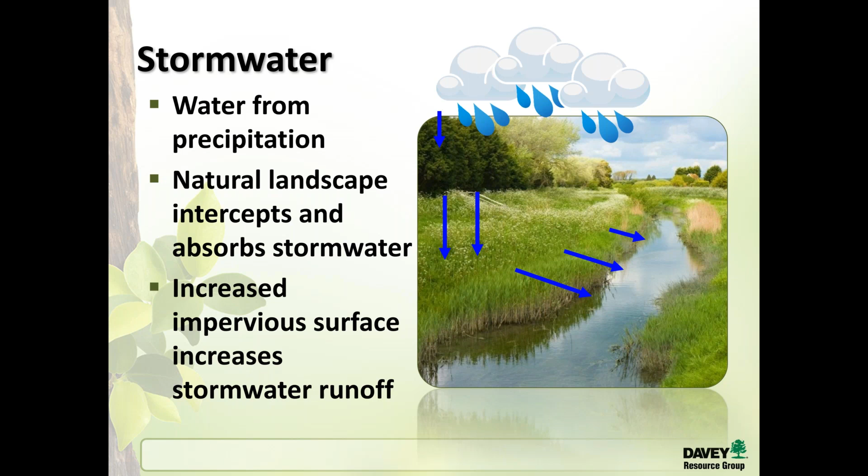So we were talking about what stormwater is and how stormwater runoff is increased by the increase of impervious surfaces. So as we develop the natural landscape, we're increasing impervious surface and increasing stormwater runoff. So we realized that we needed to regulate this runoff and figure out how to treat it so that fewer pollutants are making their way into the waterways.

So how is it regulated? We have regulations under the Clean Water Act. In 1987, there were amendments to the Clean Water Act that actually introduced stormwater. And those regulations mostly revolve around the National Pollutant Discharge Elimination System. The acronym for that is NPDES. When that first launched, they were looking at point source contamination, so mainly just industrial sites that were directly dumping into waterways.

Later on, there were further amendments that determined we needed to look at non-point source places of pollution. So that included stormwater runoff and where that water was picking up excessive pollution that was entering the waterways. That's mostly regulated by the Environmental Protection Agency. In some states like Ohio, it's regulated by the Ohio or the state EPA.

And then after construction is complete and 70% vegetation is reached, the developer or the property owner is released from that permit, and they tend to have post-construction best management practices. Those are regulated often by counties and cities under land management agreements where the property owner has assumed responsibility for managing and maintaining the stormwater facility or BMP.

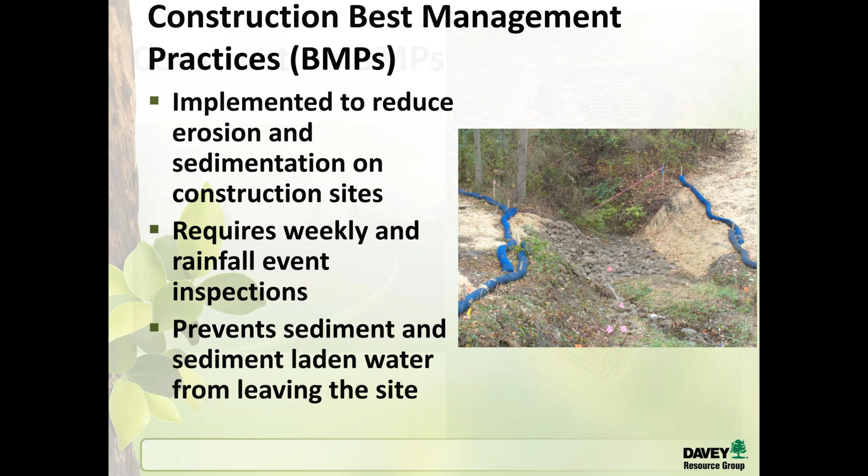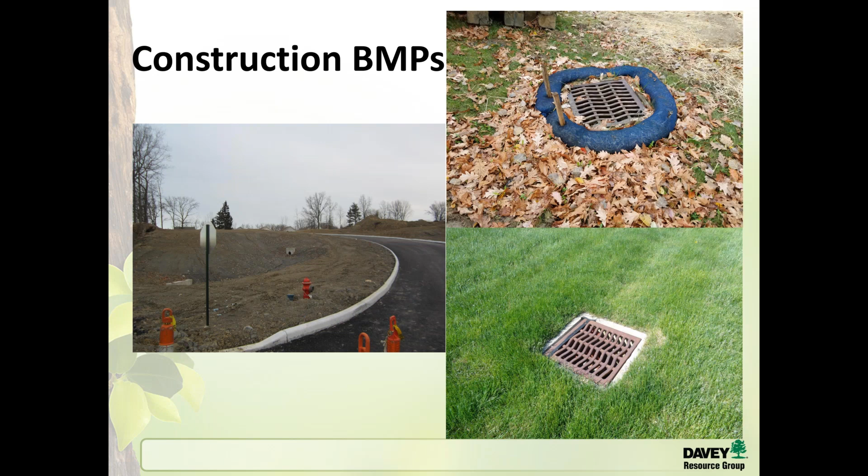And on the left side of the slide, we have a sediment basin. So this area is being developed into a subdivision, and the runoff runs into the sediment basin. And the purpose is kind of the same as the ponding for the inlet protection: the sediment drops out before the water flows through the rest of the system. Go ahead and click through.

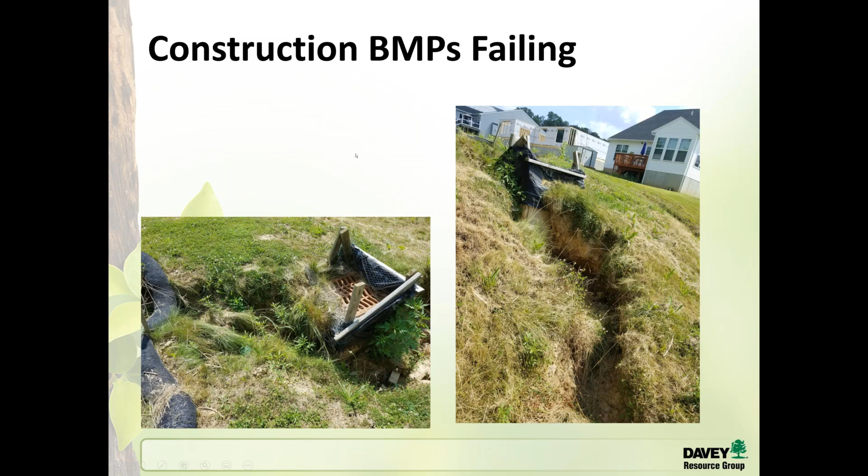They're always going to require inspections and maintenance to ensure that they're functioning properly. And that's going to be based on that management agreement that the property owner has with the city or county. In some instances, there is no agreement, but almost all of them now have agreements where the owner is taking responsibility for that feature. In some cases, it is a biannual inspection, so we go like spring and fall and look at all the features on site.

I'll have to excuse the... Never mind the train. Yeah, we're right next to the train tracks here in Kent, so I apologize. I'll give it just a sec to go through. Okay, I think it's far enough now that you guys should still be able to hear me.

Where's that coming from? Okay. We had a little bit of technical difficulty there. Sorry about that.

So there's some common things that we look for during the inspection. And with these basins and the dry basins, it's best to have your inspections done and address those small maintenance issues, because with stormwater basins, those small issues can become large issues very quickly, and they don't go away if you try to forget about them. So it's always best to take care of them when they're small.

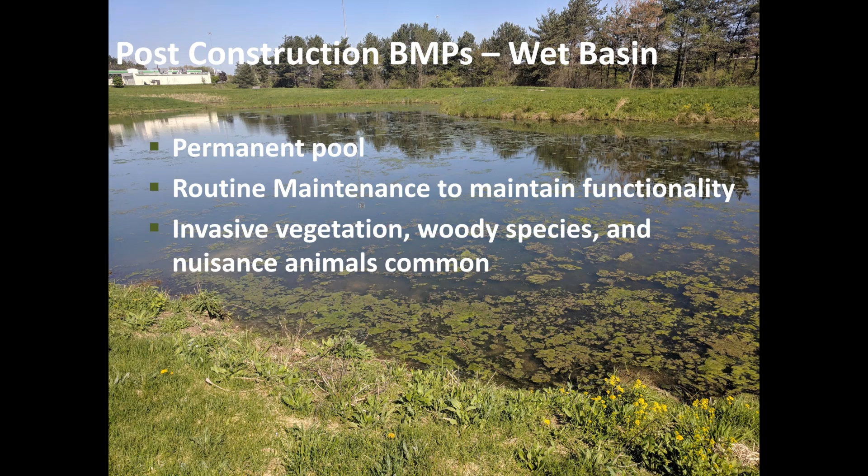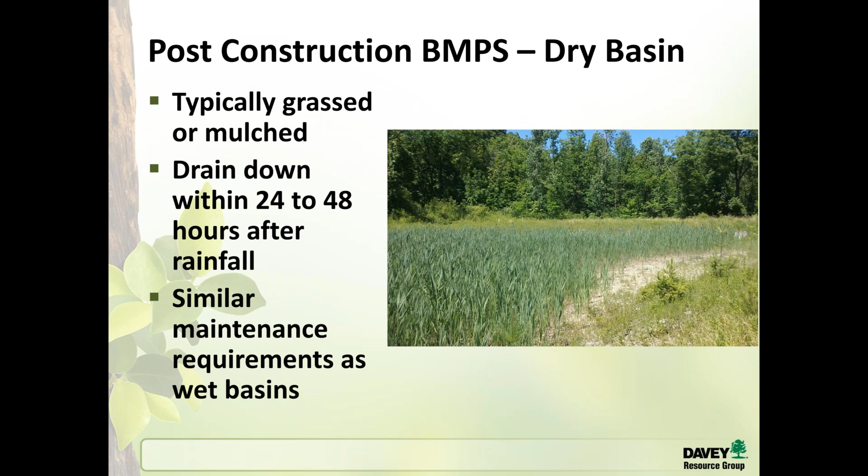Another post-construction BMP is a dry basin. Typically, they're grassed or mulched. They're meant to drain down within 24 to 48 hours after rainfall, and they have similar maintenance requirements as wet basins. This photo here is of a dry basin that has become taken over with Phragmites and invasive cattail. So our recommendation would be to address the invasive species and then reseed the bottom of the basin so that it can continue to function properly and address the same water quality volume. So that's the amount of water that it's meant to treat from runoff from the facility.

And lastly, we have bioretention cells. So they have similar maintenance to basins, and they're shaped in some ways. The grassed ones are shaped similarly. They have a little bit different outlet structure usually, and they usually outlet directly into storm sewers. And they're adequate for smaller developments that have limited space. So you might not be able to install a large basin, but you can install a few bioretention cells in different areas of the site to treat the same amount of runoff.

Some main maintenance issues with these is to maintain the vegetation, whether it's planted vegetation, as in the bottom photograph, or to maintain that grassed vegetation in the top photograph on this slide. And they do face similar erosion issues and things of that nature. And Dave is actually going to go a little bit more in depth with those.

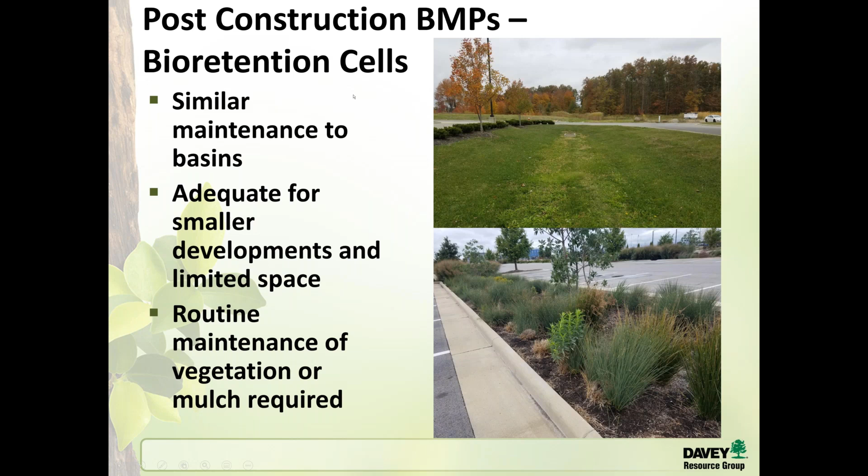Annual inspections are vital for all of these features. They should be performed by certified inspectors so they know what to look for and how to identify issues and help you address them correctly. They do inspect all the features and facilities on your site. So you may have a site that's really large. You might have permeable pavement and a wet basin and other features. So they would look at all of those and provide you with inspection form and report, and then also hopefully recommended maintenance for those features.

Inspections and maintenance are always less expensive than if you're trying to do retroactive maintenance where you have a large issue. And I have some pictures on some upcoming slides and I'll give you an idea of what some larger scale issues might be versus just some small issues that can be taken care of in a day or, you know, within one or two site visits.

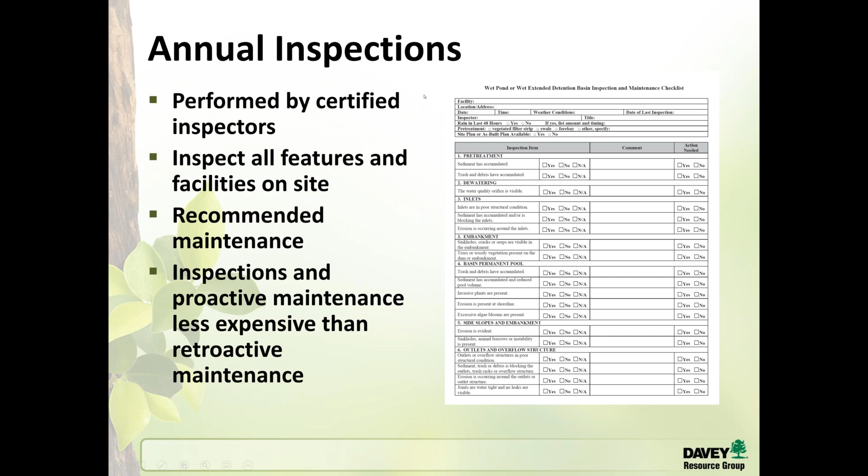These photos are some common maintenance issues that we see. So on the top right side, we have a curb cut inlet to a bioretention cell that has been overgrown with grass, and it's also clogged with sediment from the parking lot. And what we would do to correct that is pull out those rocks and regrade the inlet and then return the rock to its place. The bottom right corner is also a bioretention cell where the influx of water has pushed the mulch all the way out to the sides of the bioretention cell and exposed the soil media underneath.

On the top left side, we have a wet basin that all the vegetation has died. It's likely that it was oversaturated and the vegetation there was not as water tolerant as they had hoped when it was originally installed. And on the bottom left side, we have a forebay to a wet basin that has become overgrown with invasive cattail. This is actually the same basin as what you're seeing in the top left photo. So that entire forebay is full of cattail. And that's pretty common. Cattail and Phragmites are common issues with stormwater features.

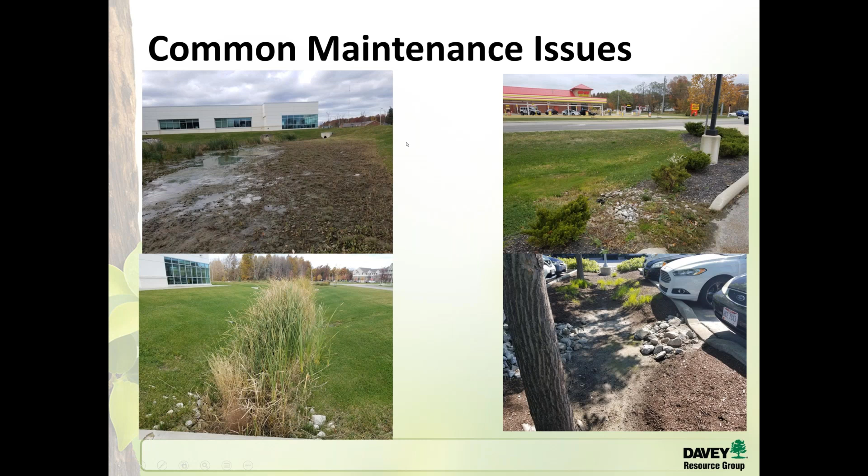These are some photos of some more uncommon maintenance issues or large-scale maintenance issues. The top left-hand side is a photograph of a muskrat lodge within a wet stormwater basin. It was not there in May of the same year, but in November during the second inspection, we discovered the muskrat lodge. In normal ponds, they wouldn't be an issue, but since muskrats like to burrow into the slopes, it becomes an issue because you're losing the stability of your side slopes, which could increase the potential for sedimentation into the basin from the side.

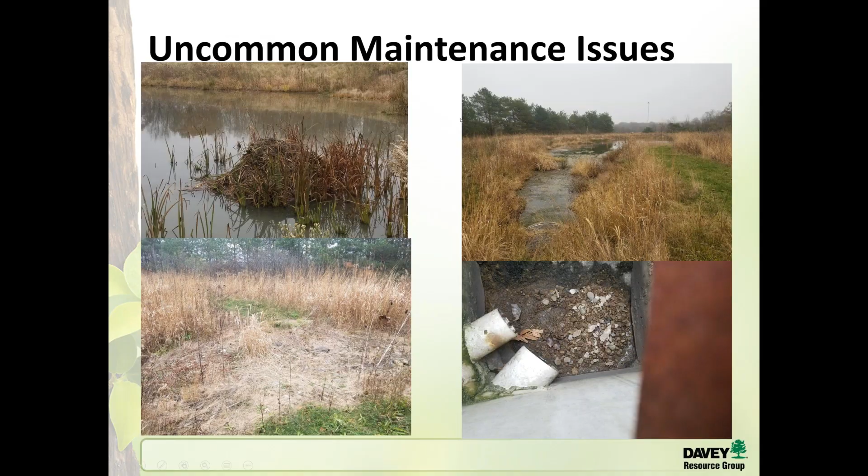Okay. Well, it seemed like the universe was against you. Yes. Through passing trains and technical difficulties. The technical difficulties are figured out, and the train has gone by. So there's a quick question from one of our attendees. Sure.

The question is, do you want to encourage native wetland plants to grow in these basins? Yes. So when we are working with clients on maintenance plans, we do encourage them to plant natives in the basins. We try to choose things that are water tolerant, whether they need water all the time, so we're recommending that for the wet basin, or they need it most of the time for the drier basins. All right. That's definitely something we encourage.

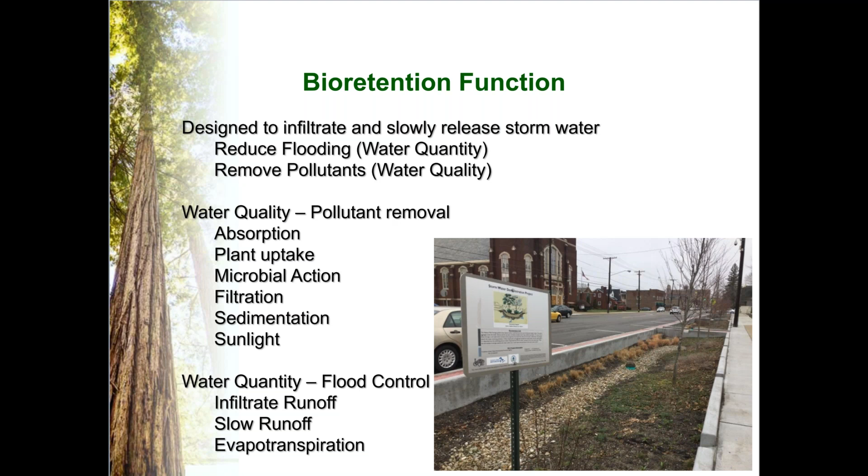So I want to talk about bioretention. Bioretention is designed to infiltrate and slowly release stormwater. It reduces the volume of stormwater, but it also, just as importantly, increases the quality. So it has the ability to provide functions for infiltration, filtration, storage, evaporation, and transpiration. A properly functioning bioretention basin or swale should infiltrate at the rate of 1 to 4 inches per hour. What that does is it gives it time to remove pollutants, and it gives time for the system to be able to accept more water over a longer period of time if you are going back into a stormwater system or sewer system.

One thing to be concerned about: over time, they do slow down the infiltration rate as they get filled with fines, clays, and silts, and compaction can cause a problem. So when you're doing maintenance on these basins, you need to be careful about your footprint. Doing things by hand and using manual equipment like wheelbarrows is much more practical than using mechanized equipment.

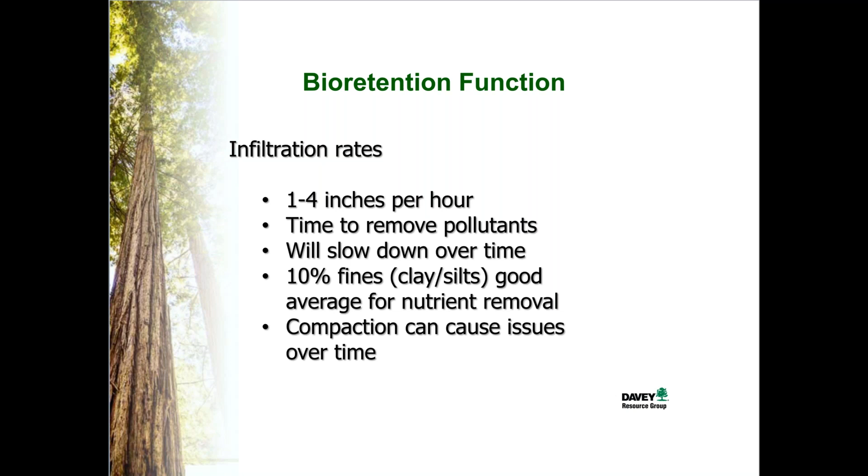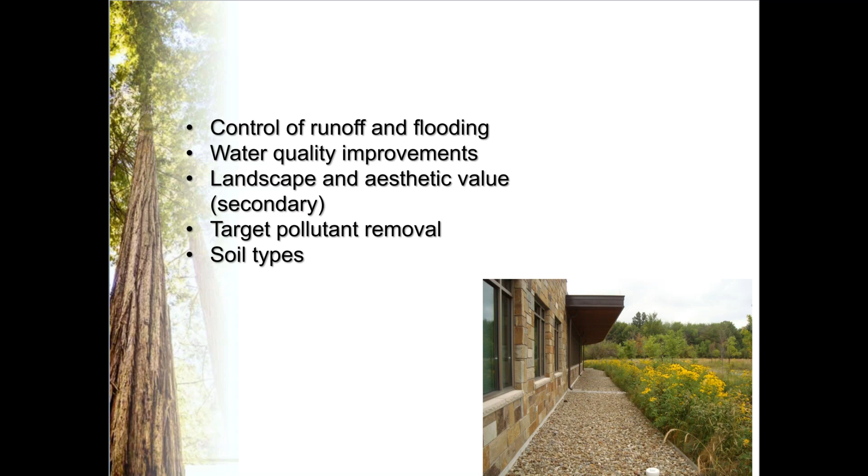So this kind of shows the major components of a typical bioretention basin. This could be a swale, it could be a basin, it could be a small installation in a parking lot. So the idea is that water infiltrates through the bioretention soil into a gravel storage layer where it's held for a while so that it has time to infiltrate into the native soil.

Typically, we do install an underdrain with an overflow inlet so that we can control the level of the water as it flows in and make sure that we don't increase flooding in areas where it's not intended. And generally, we use plants to improve the stormwater quality as the water moves through them. They tend to trap pollutants and hydrocarbons and pull it out of the water so that we're getting clean water back into our system.

The mulch layer prevents weeds from growing up, and the plants provide habitat, aesthetics, and transpiration. And as you can see, the water comes in from the roadway and infiltrates down through the soil, and the overflow goes to a local sewer or to the environment if the capacity is there.

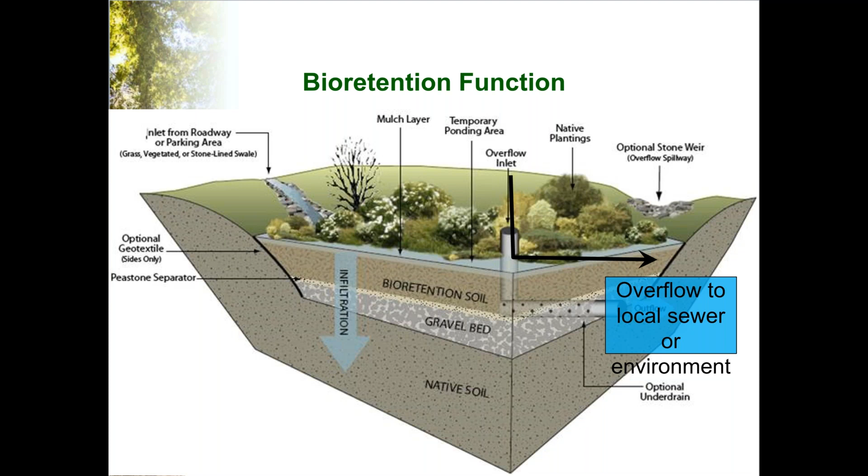So I'll show you a real life situation. This is the Kingsgate Conference Center in Cincinnati, Ohio, and we were approached by the building manager. The problem was that water is sitting in a low spot, and this is the front entrance to the building. Water runs off from the upper levels of the building. There's a parking garage on the side, and water that hits all of that flowed down the hill, and this entrance was the lowest point of the property.

So we were also getting overland flow off the roadway, and this area was inundated with water. And in the wintertime, the drains that were there didn't have the capacity to accept all the water. It would get filled with sediment and mulch and leaves, and it would flood and then it would freeze, creating a safety problem for people trying to attend the conference center.

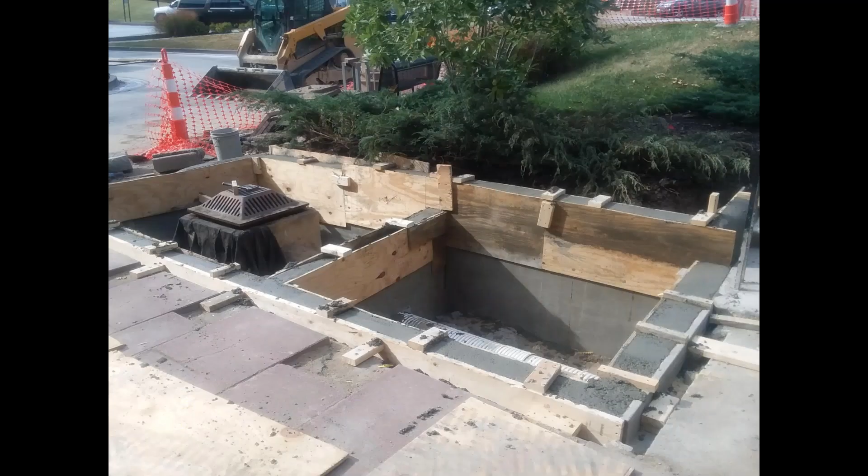So we suggested doing two bioinfiltration basins on either side of the plaza. These were the lowest points of the plaza, and we were able to use the existing stormwater inlets. So we incorporated them into the design and built these structures with a pretty minimal footprint, so we didn't impact the use of the plaza or the front entranceway. We looked at it, and the size of them was enough capacity to manage the stormwater that was coming into this area.

So back to a longitudinal profile. This is kind of the different layers that we'll be looking at as I go through the construction of these basins. So starting from the top, it's the elevation of the overflow. That's where the drain opening is. And then there is a soil media. It's a bioinfiltration planting mix that's designed to infiltrate water, but also have enough organic component and fines in it to keep plants alive.

You always have to do some testing. You can use an infiltrometer or you can do perc tests, but you always have to make sure that your mix is lean enough to move water through the system as it's designed, but you also don't want to have to go water really often. We know that because of the way the mix is designed, we will have to water during dry periods of time, and we try to use native plants to minimize that. But you try to reach a balance where you're getting the infiltration rates that you want, but you also are able to keep the plants alive.

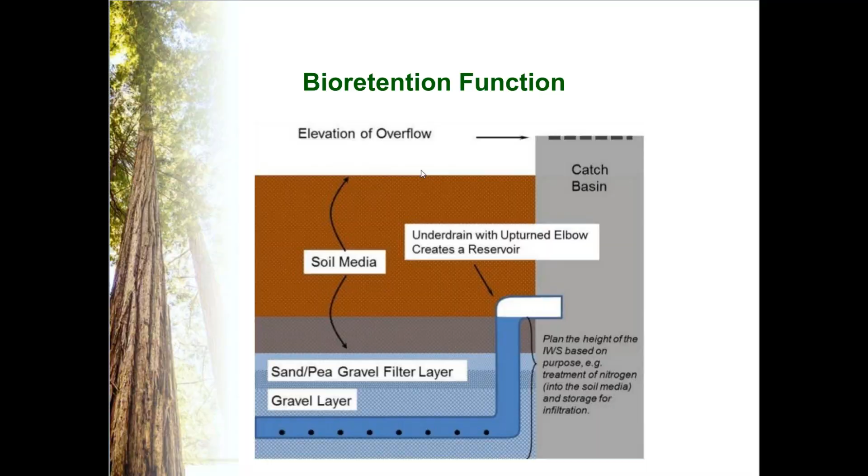And the black geotextile fabric is in place because in Cincinnati we have heavy clay soils with a lot of fines in them, and they tend to migrate upward into the gravel layer and can clog it up. So the goal here is to allow as much water that will pass through that clay layer as possible to go through, but also to help keep the fines from working back up into the biofiltration system and blocking the pores.

So here's a look of the different layers. The number 57 gravel. We use that because we can calculate the storage volume between the angular gravel. It's generally pretty consistent no matter where you are. And then the next layer is the pea gravel. That is to keep some of the fines from going through. And then on top of that is the clean sand. So the pea gravel holds the sand in place and it prevents the fines from migrating through to the gravel layer, but the water can still pass freely through.

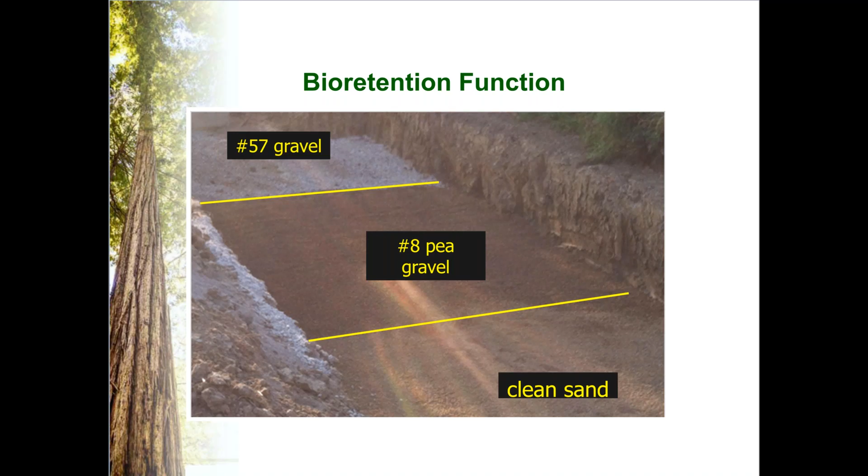And we always put in a clean out. It's very important in case there is a clog over time, so that you can run a snake or a hose through here and wash it out and have access to it rather than having to dig everything up. So here we are, we're looking at the sand layer on top of the gravel, and we're starting to put in the bioinfiltration mix. That's the darker brown color material. And the freeboard on these, the amount of space between the planting bed, the mulch, and the inlet should be 12 inches. That is storage capacity for water to infiltrate in.

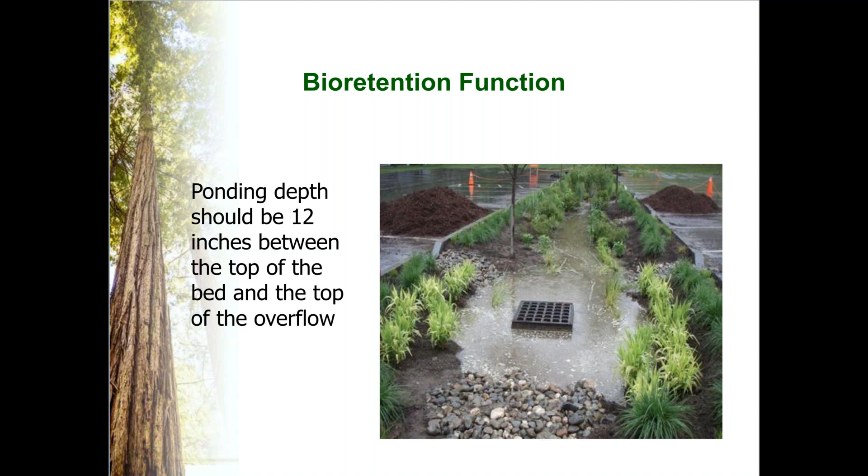And here's our final product. We used native plants. As much as possible, we matched the landscape plants that were used at the conference center. So these are a mixture of Shasta daisies, coneflowers, and panicum grass. The goal is to achieve 75% coverage of the area. And we prefer to use decorative gravel for mulch than double shredded hardwood. So a little bit about maintenance.

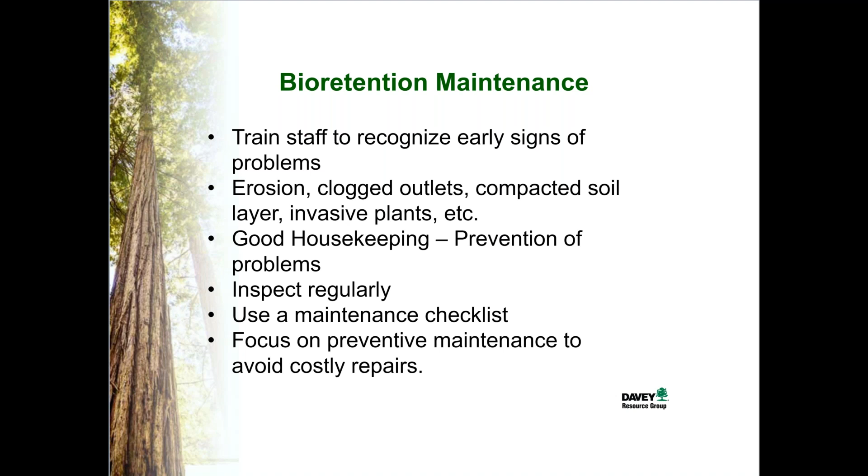As Becca mentioned, the most important thing is to get your eyes on this and to recognize early signs of problems. If you don't do that and you let it go over time, it can get clogged up with erosion, with leaves, with all kinds of litter, trash, and it stops working. And at some point, you may have to dig the whole thing up and start over again. So we want to prevent that by good housekeeping, prevention of problems. Inspect it regularly, keep track of it, keep track of what you do, and focus on preventive maintenance to avoid big expenses.

So some things to look for: function, a clogged outlet or loss of mulch. Aesthetics such as dying plants can lead you to problems. For example, if the plants are dying in the lower parts of the basin, chances are good that the water isn't infiltrating as quickly as it should be. Also look for safety issues. Overgrown vegetation can cause the loss of line of sight if these are in the right of way. Low branches that people could walk into, blocking sidewalks or doorways.

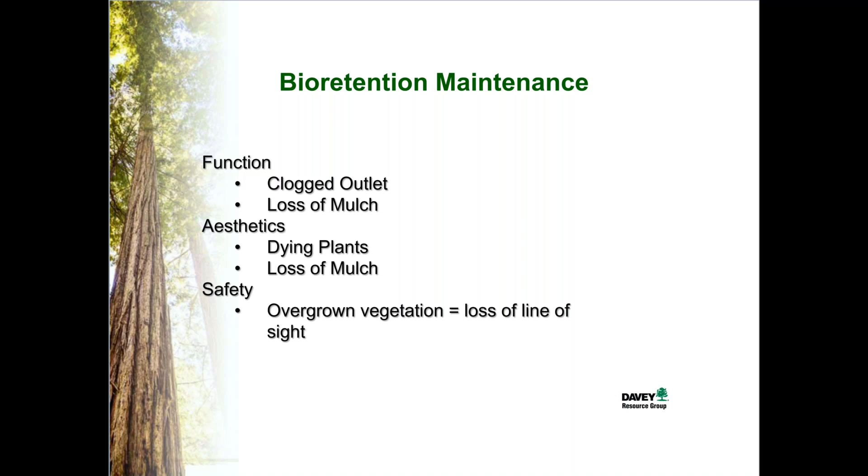Most of the recommendation standards are to use double shredded hardwood mulch because it doesn't float as freely as single shredded or wood chips do. And a 3-inch layer does prevent weeds. It adds a little bit of organic material and conserves moisture in the dry weather. But as I stated before, we like to use gravel. We like to use angular decorative gravel because it tends to stay in place much better. It infiltrates, and we're not introducing organic matter to the system, which I think is a good thing over time.

I think if you keep adding mulch each year, you're just adding more fines that at some point are going to slow down your infiltration rate and potentially clog it. So I prefer to use the gravel, and then just do soil tests periodically, once a year, once every other year, so that you can monitor the organic component of your soil and fertilize if you need to. And I would suggest a liquid fertilizer as opposed to granular.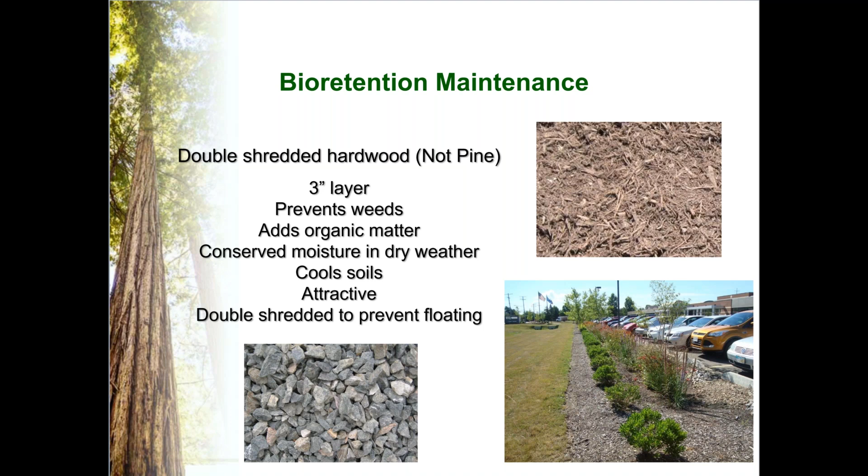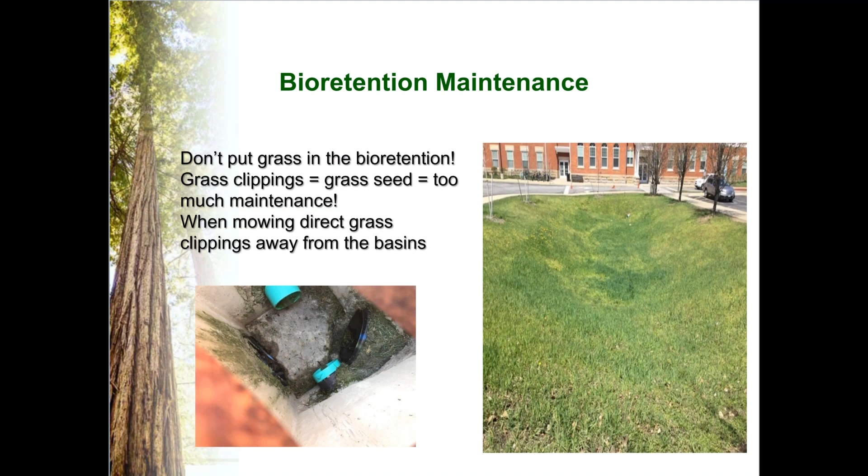Plants, the plantings are very important. They provide uptake of nutrients and water and stabilize the bed and make it attractive. We want these to be things that the public, our users, people who visit our parks and our buildings see and appreciate. And while they might not understand all the functions that they're providing, as long as they look good aesthetically, I think that people will like it and accept it.

So when you choose your plants, you want things that look good. You want to have a 4-season display horticulturally, but you also need to find plants that can tolerate temporary inundation, especially for the lower parts of the basin. If it's a gradual slope, you want to use natives or cultivars depending on what's available in your area and what works the best.

We also recommend that you plant them in deliberate patterns and plant them in clusters so that people doing the maintenance can understand what they're supposed to keep and what they're not supposed to keep. That can be very difficult for some people who aren't specifically trained in this to identify the differences between cultivars that are intentional, and invasive plants and weeds and things that aren't wanted there.

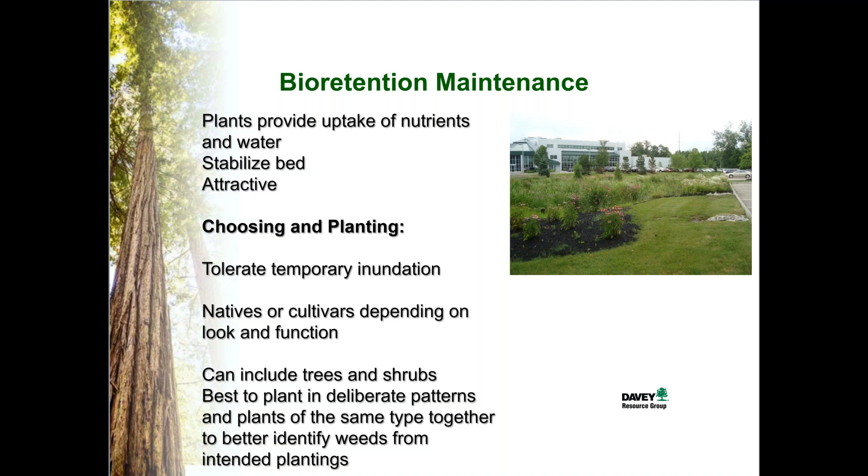Some more maintenance issues. Again, look at the plants and see if they're healthy, and also see if it's overgrown. We don't want the plants to block inlets or outlets. We don't want them to block surrounding sidewalks or curbs. We want people to have good sight lines. Replace dead plants as soon as possible. Sometimes you have to look at what's working and what's not working in your basin or in your area.

Again, do a soil test if you're not sure if there's something going on and you've replaced the plants more than once. Do a soil test. Also, you want to look at it when it's wet and dry and see. Just stick your finger in there underneath the mulch and see what's going on.

Hand pull weeds as much as possible. We don't recommend the use of herbicides because typically these are going into water and you need special training for that and special pesticides. Again, pruning, make sure that trash is picked up. Make sure that there's not plants in the basin shading out other ones that you want to keep.

Watering, you want to water right after planting and during the first growing season, and after that during droughts. You don't want to water them too often, but at the same point, as I mentioned before, these are designed to dry out, so you should monitor it.

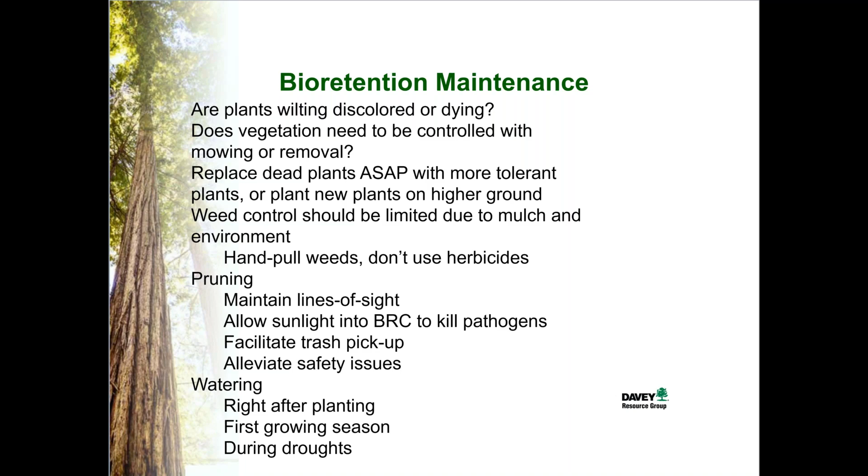We also recommend that you keep good records. You should document everything, areas of erosion, dead plants. You should photo document as well. You should inspect the outlets and overflow as much as possible.

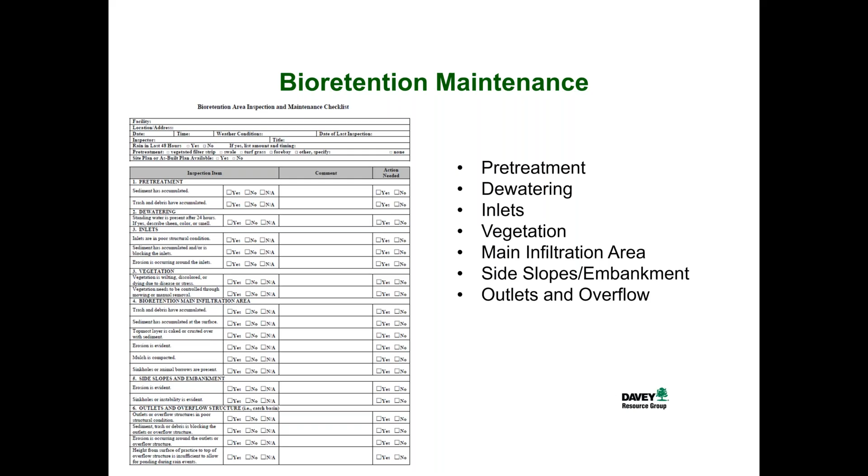So as I said before, water should flow at a rate of 1 to 4 inches per hour. If it's standing more than 24 hours after a rain event, that's a problem. You can do some core aeration sometimes and get it moving again. Typically that's a short-term solution, but you can try that first. And if it's severely clogged, you may have to dig it out and redo it.

Also make sure to check the underdrain pipes. If it has an underdrain, check the cleanout if it's flowing slowly. Maybe you just need to blow that out, put some water pressure on it or a snake and get it opened up again. You can also dig a test pit somewhere near the middle to see where it's clogging. That may help you figure out where the problem is.

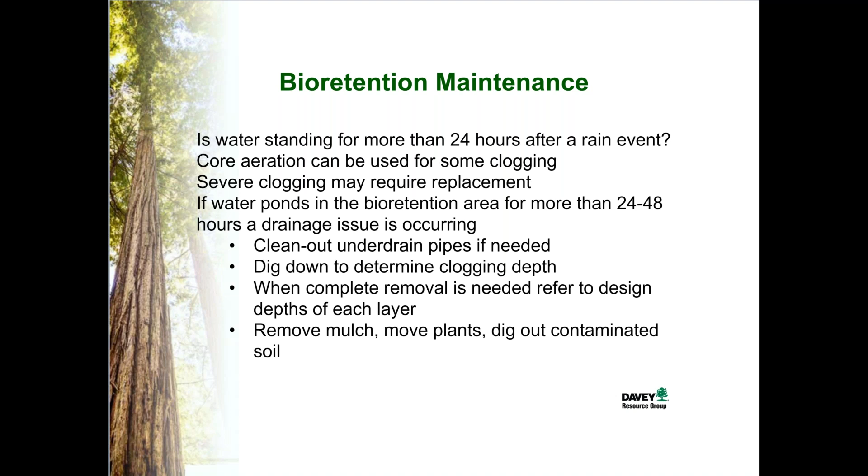Also, when you have to do it, you need to dig out everything, remove the silt, mulch, move the plants, dig out the contaminated soil and start over again, which is what you're trying to prevent. Also need to check the inlets. Are they in good structural repair? We don't want them to be collapsed or blocked. Look to see where the sediment's coming in. If you do have problems with it, is it something you can stabilize outside the basin, outside the BMP, to prevent it from coming in?

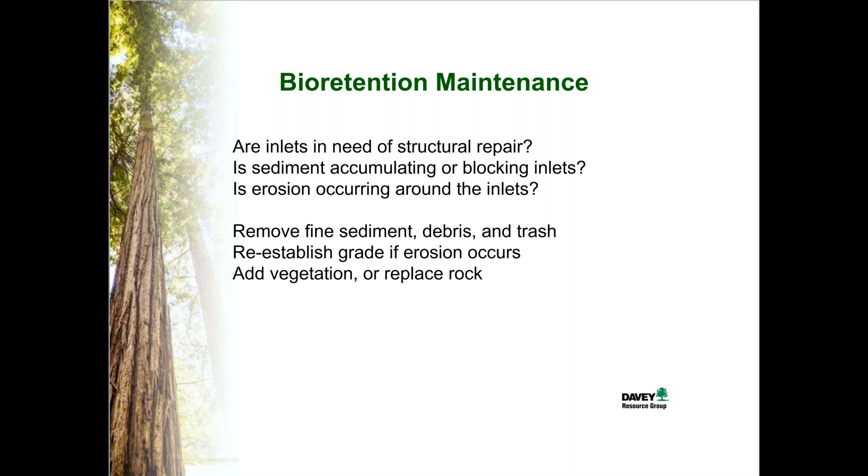And it's not always possible with bioinfiltration basins. The swales are a little easier, especially when you're using curb cuts off a parking lot or off a roadway like this. Again, maintenance, we have to look at the area surrounding it as much as we do the BMP, the basin. Make sure that trash and debris is picked up. Make sure that sediment isn't accumulating on the surface of it. If it's crusty or caked over, water doesn't infiltrate through it as quickly as it should.

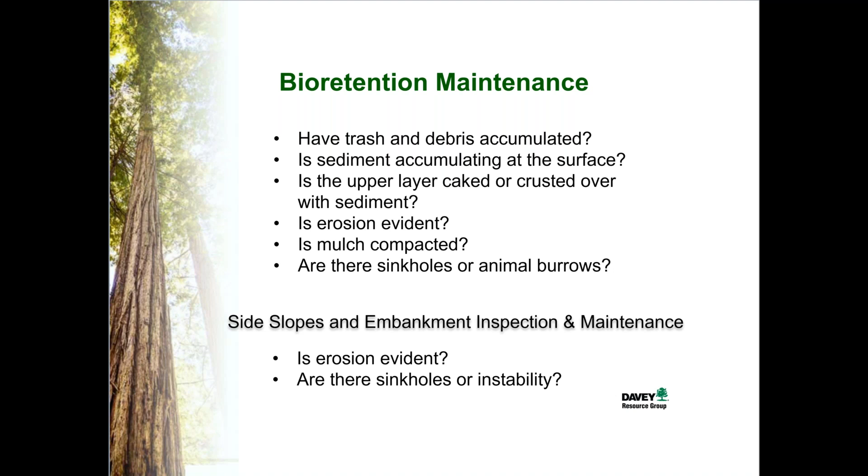Also beware of compaction, and make sure there's no sinkholes or animal burrows, things that are going to undermine the system. The slopes that lead to it should be covered with vegetation or stabilized with stone or gravel, and make sure that they are intact as well. Also, dog poop. That's a problem. No other way to say it, Dave. It's nutrient loading, and we don't want that. Obviously, aesthetically, we don't want to look at it or smell it when we're walking by, but that should be picked up, as well as the leaves. We should always try to keep them free of leaves and seed heads.

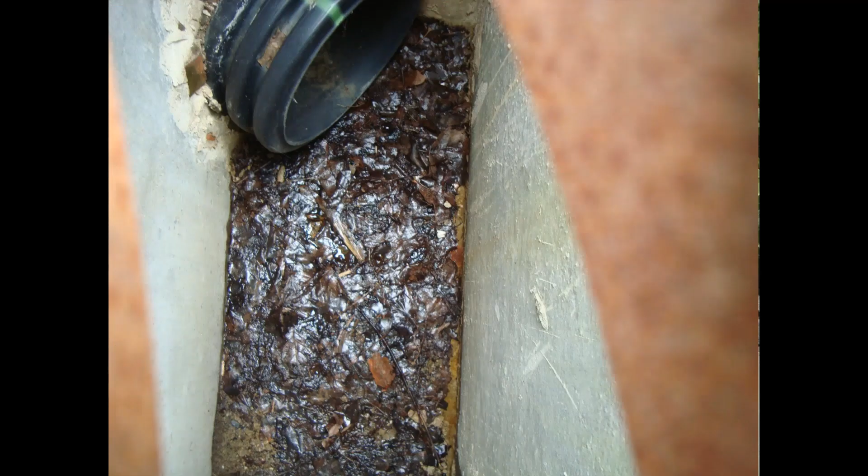And the other thing that we look for is, are there overhanging trees nearby that can be limbed up, pruned back a little bit to try to reduce the amount of leaf load that falls on it. The water going through it should come out clean. If it comes out looking dirty, then there's a problem. Probably a leak somewhere, or it's bypassing the infiltration layers around the edge. So the water coming out of these should be pretty clean.

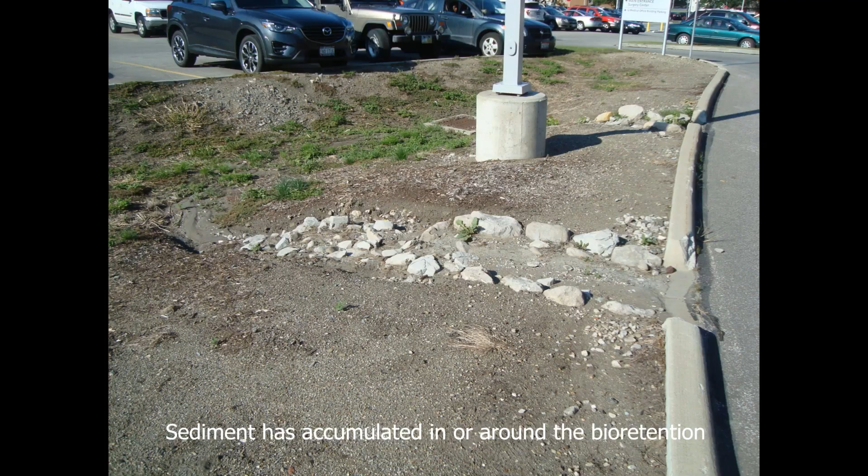We also have to look at where the water's coming in. This inlet, you can see it's all silted in. Probably applications of sand and gravel over time on the roadway for controlling snow. Could be just dead plants along the edge, over time, from people either driving on it or misapplication of chemicals. But this whole thing needs to be cleaned out. The sediment needs to be removed, and it needs to be replanted and stabilized.

So again, some basic things. Don't dump grass clippings, leaves, soil, or trash into the areas. Keep them picked up as much as possible. Add mulch or vegetate bare soils. Don't over fertilize nearby lawn areas. We don't want to get nutrients going into this thing. Dispose of pet waste properly. Keep the area around it as clean as possible.

Protect it from salt and de-icing agents. Water's going to sit in this for a while, and we don't want to kill the plants in the wintertime. Don't plow snow into it. Plant native trees, shrubs, and perennials to assist stormwater retention, and periodically test the infiltration rate. And that's what I have for you today.

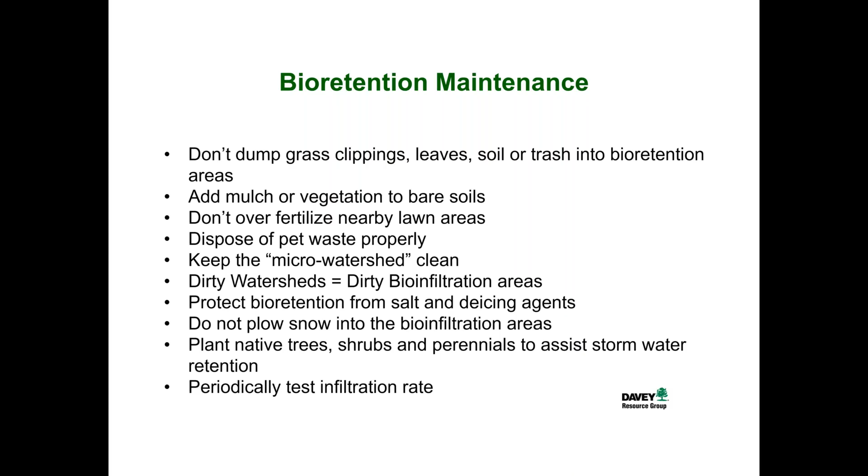Yeah, I am working on a research project with a group of PhDs from Malmo, Sweden. The Swedish federal government is paying for a study to see how green infrastructure can be used to meet the United Nations Sustainable Development Goals. So the idea is that cities want to apply green infrastructure, whether it's stormwater management BMPs, reforestation, parks and green spaces, green roofs.

How do they get credit and recognition for the improvements that they're making in the environmental quality and actually working towards meeting the United Nations Sustainable Development Goals? There's no way to track that. There's no way to measure that. So the research project, at least the first part of it, the pilot, was 3 cities, comparative cities from different cultures, different parts of the world.

So the 3 initial studies were Cincinnati, Ohio, where I was one of 2 people who were the main point people for that study, and I focused on the parks, the street trees, and the green infrastructure BMPs, mostly stormwater related. And then the other one was Addis Ababa, Ethiopia. They have some of their own challenges, mostly dealing with stormwater, water quality. Theirs is a little more serious than ours. They're worried about drinking water quality and sewer treatment issues, but they also have green infrastructure, BMPs and street trees and other things.